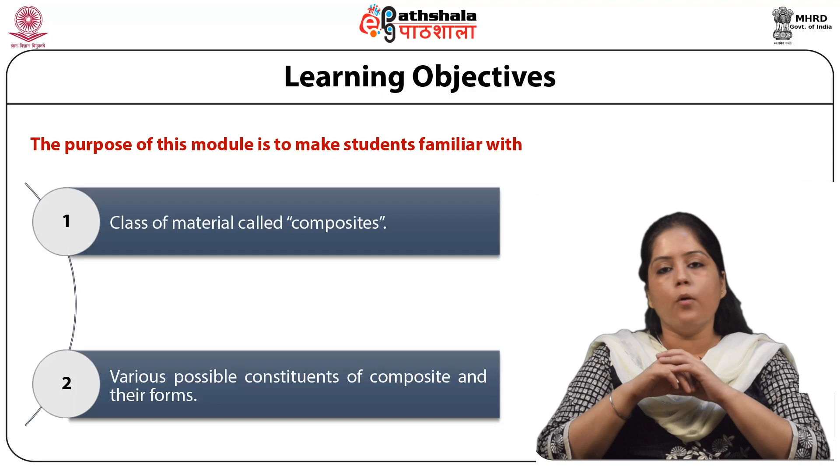First, the class of materials called composites. Second, we will discuss the various possible constituents of composites and their forms. Third, the elastic properties of composites are discussed. Fourth, the mechanical properties of composites are discussed. Lastly, the commercially and technologically relevant composites are discussed.

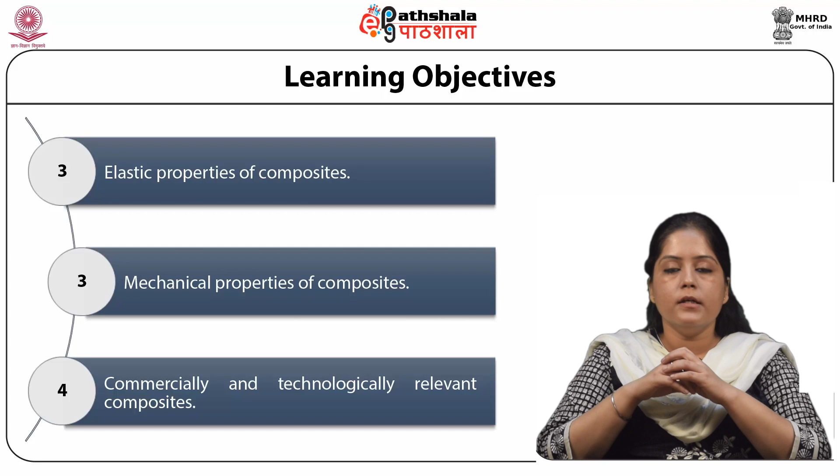Let us start with a basic introduction to the module. There are already several classes of materials available: metals, ceramics, polymers, etc.

Then why is there a need for still another class of materials like composites? There are two main reasons for this, which are interconnected. First, modern technologies demand materials with multifunctional characteristics. Second, there is demand for materials with properties significantly better than existing ones. Currently, materials have their own limitations, and hence there is a need for combining the good properties of one class of materials with that of another.

For example, consider metals, ceramics and plastics. Metals have decent strength and ductility and good toughness, however their density is on the higher side. Ceramics are relatively less dense and very good temperature resistant, however they are beset by poor toughness. Plastics have low density and very good ductility, however they lack thermal stability, chemical resistance, and have very poor mechanical properties.

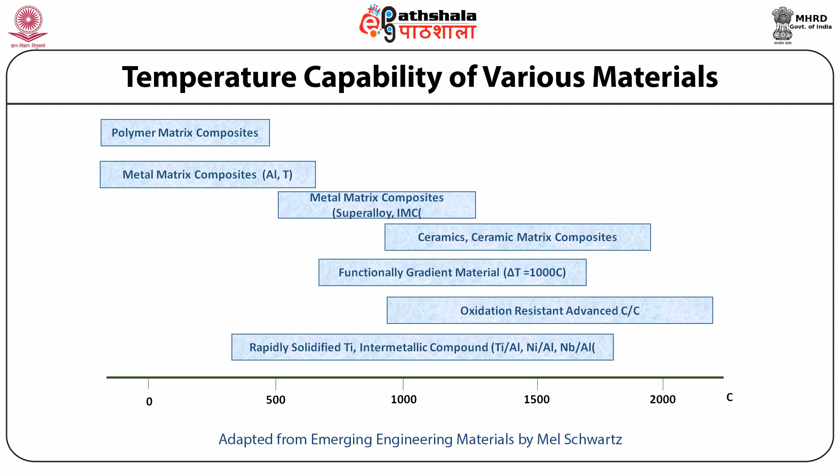So now we will discuss what are composites. In simple words, a composite can be described as a non-homogeneous mixture of other types of engineering materials, that is, matrix and second phase. This figure gives a better understanding of what is really meant by a composite. As shown, composites are nothing but a mixture of any two materials. Usually one of these would form the base or matrix, and the second material is present in the form of dispersoid or fibers. Based on this definition, we can broadly classify composites into three, or basically four, types of classes which we will be discussing.

First is metal matrix composites, where the primary phase is a metal and the reinforcing phase can be metal, ceramic or polymer. Second is ceramic matrix composites, where ceramic is the matrix phase and also the reinforcing phase in most of these; ceramic matrix composites with metal or polymer reinforcement are not common. Third is polymer matrix composites, where the polymer forms the matrix phase and is reinforced by various kinds of metals, ceramics, and even polymers.

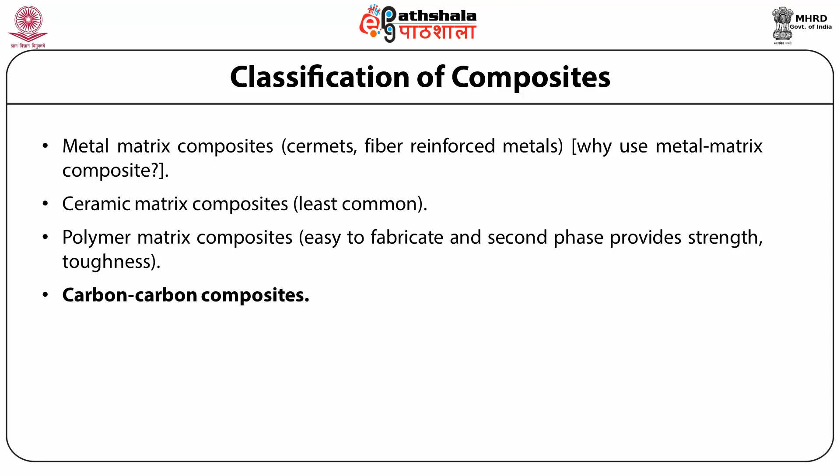Fourth kind of composites are carbon-carbon composites, where carbon fibers are used in a graphite matrix. They are used in the nose of wings and brake plates of airplanes. They have very high temperature resistance and wear resistance, but also have low impact toughness.

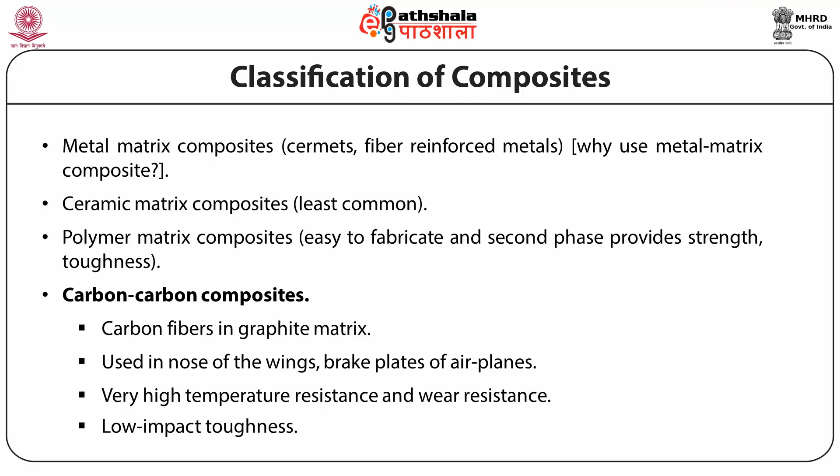Intermetallic composites: intermetallics are a class of materials formed when two or more metals form a compound. These intermetallics are usually found in alloys at different compositions, and hence together can be viewed as a composite, which is very useful for high temperature structural applications. They are lighter, stronger, and more temperature resistant alloys, so they can be used in aerospace, automotive, and chemical industries. They are suitable for temperatures above 1200 degrees Celsius.

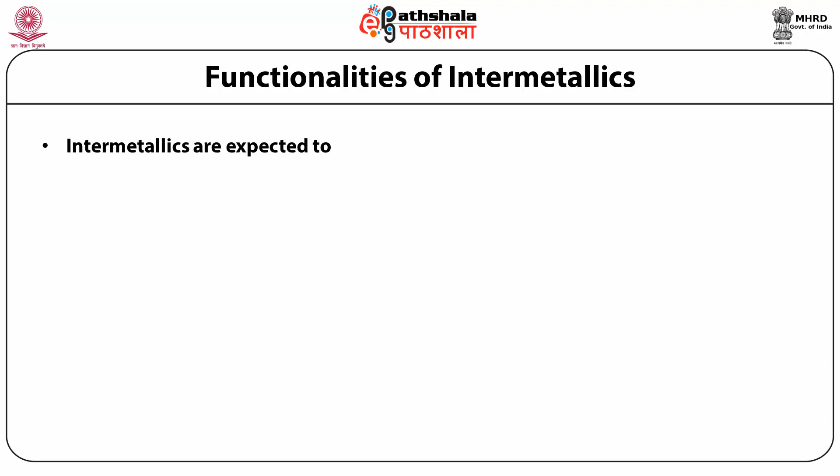Till now we have discussed what intermetallic composites are. Now let us discuss their functionalities or properties. Intermetallics have a very high melting point and retain good mechanical properties at these elevated temperatures. They possess good functional properties like resistance to environmental degradation and chemical stability.

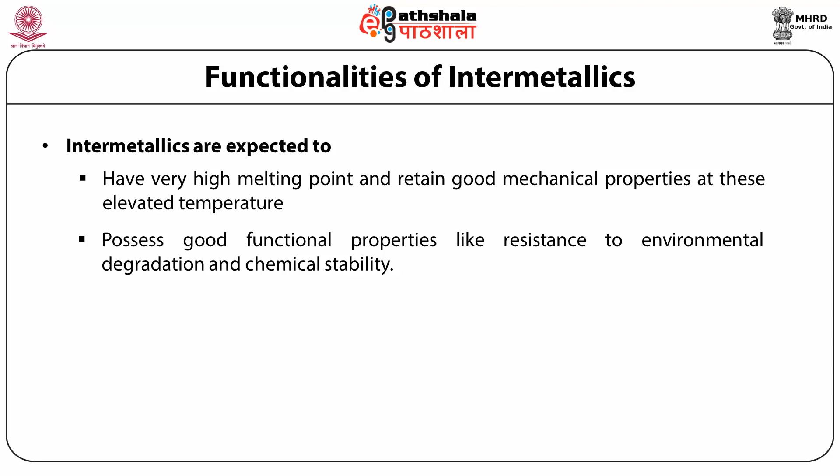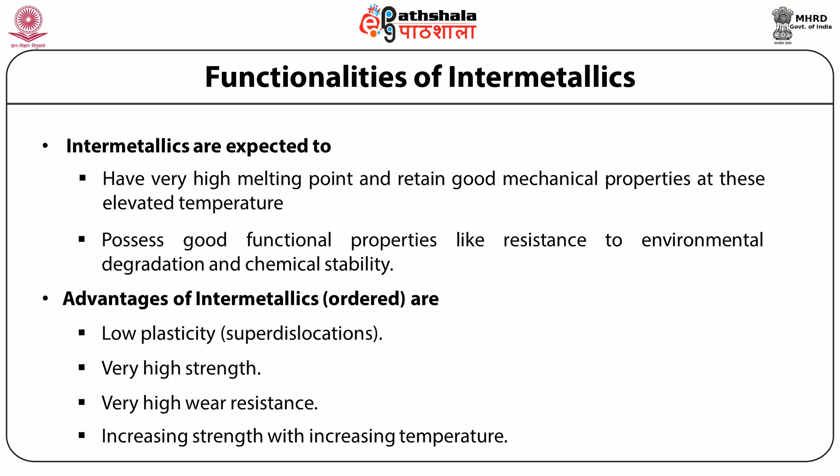Intermetallics have a lot of advantages: low plasticity, very high strength, very high wear resistance, and increasing strength with increasing temperature. However, they possess low toughness and low ductility, much like ceramics. When present as part of a composite alloy, these deleterious effects are counterbalanced by the matrix phase.

Intermetallics can form two kinds of composites. First, metal matrix intermetallic composites, where the matrix is made up of a softer metal or alloy and the hard phase consists of intermetallics. The best example is the nickel superalloy; demand for material systems which can withstand long-term exposure to elevated temperatures has led to the development of intermetallic matrix composites, IMCs. In the conventional sense, composites consist of two phases, a primary phase and a secondary phase.

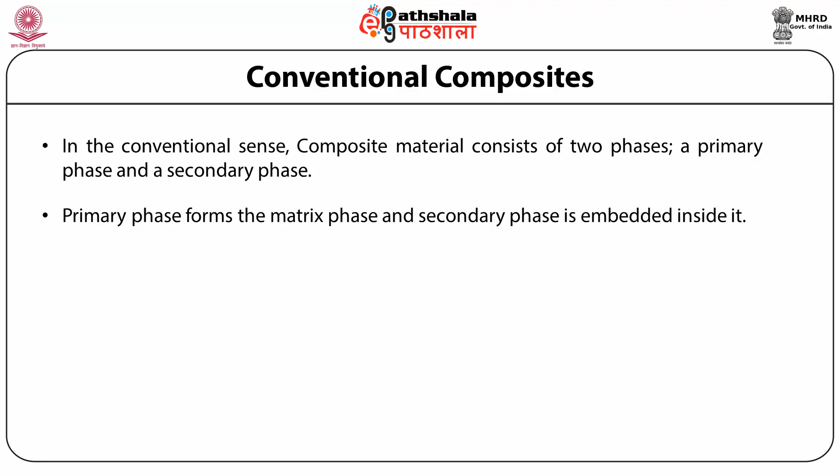Primary phase forms the matrix phase or base, and secondary phase is embedded inside it. As discussed earlier, composites can be classified into three categories: metal matrix, ceramic matrix, and polymer matrix composites.

Now, if the secondary phase is a metal that is reinforced when the primary phase is a metal, then we get powder metal parts infiltrated with a second metal. And if the primary phase is a polymer, examples are plastic molding compounds and steel belted radial tires.

If the secondary phase is a ceramic consisting of a metal primary phase, we can form cermets, fiber reinforced metals. If the primary phase is a ceramic, we can form silicon carbide whisker reinforced Al2O3. And if the primary phase or matrix is a polymer, we can have plastic molding compounds or fiberglass reinforced plastic.

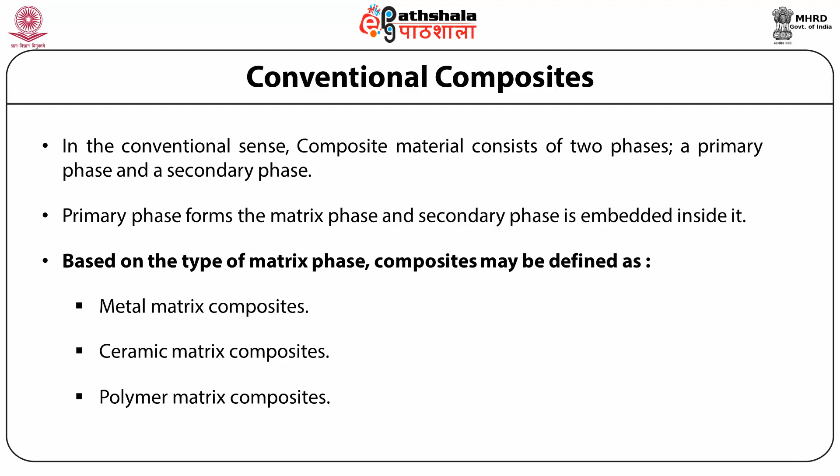So there are various roles played by various phases. The two different phases, primary and secondary, have very specific roles to play - the role of matrix and reinforcing phase.

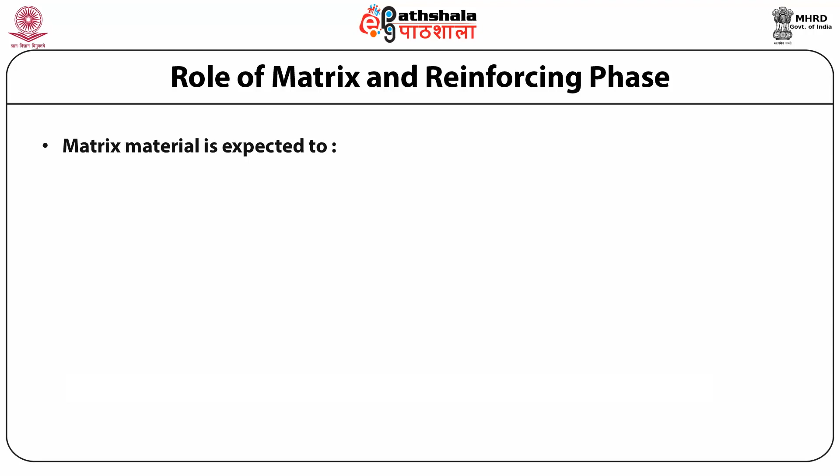First, let us discuss the role of the matrix phase. Matrix material is expected to first provide the bulk form of the component, second, hold and protect the reinforcing phase, third, share the load with the reinforcing phase, and lastly deform partly so that the load can be effectively transferred to the reinforcing phase.

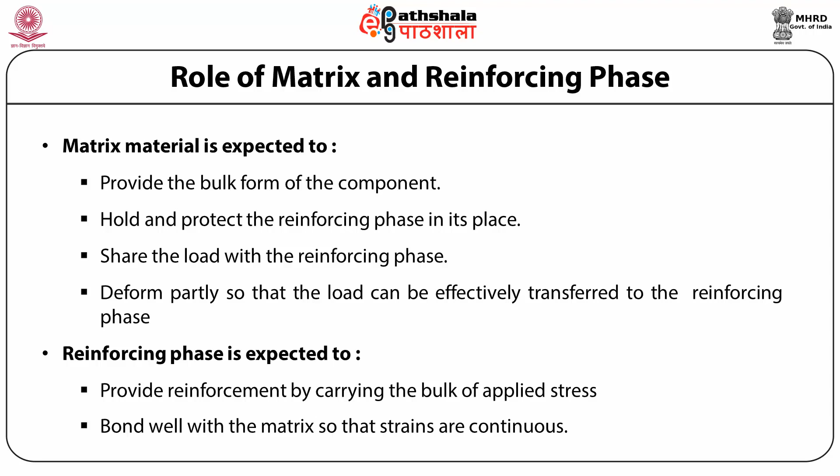Now, the reinforcing phase is expected to first provide reinforcement by carrying the bulk of applied stress, and second, bond well with the matrix so that strains are continuous. Now let us discuss each category of composite in detail.

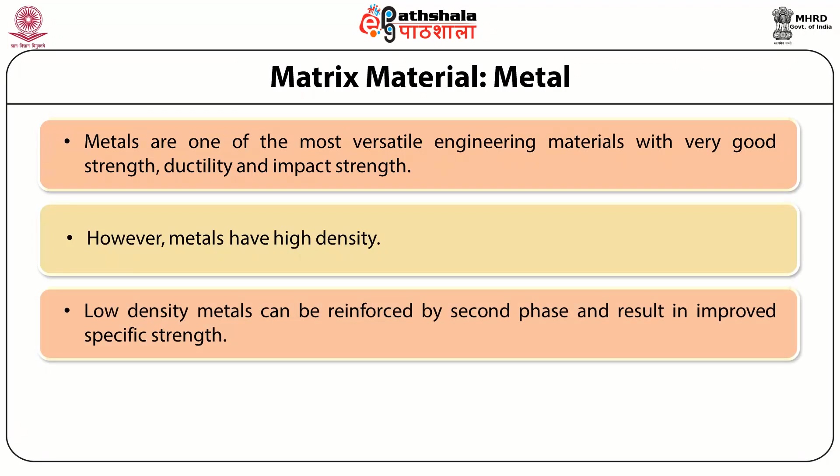Here we will discuss when the matrix material is a metal, that is metal matrix composites. Metals are known for their very high ductility and strength. However, they have relatively high density.

Hence, the primary purpose of metal matrix composites is to enhance specific strength or specific modulus, for example by adding lightweight fibers, or to improve high temperature properties or wear properties, for example by adding ceramics as the second phase. It must be emphasized that among composites, metal matrix composites are the most commonly used material systems. Ceramics and fly ash composites are very well known and widely used metal matrix composites.

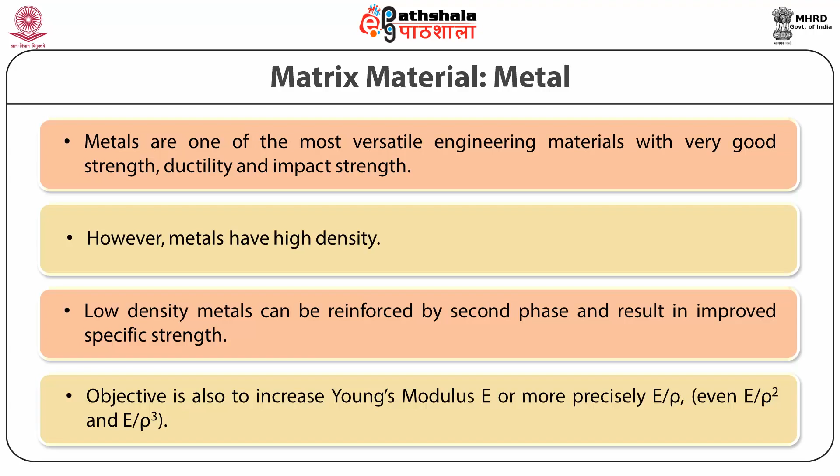Ceramic matrix composites, or when the matrix is a ceramic - the primary purpose of the matrix phase is to provide form and support to the secondary phase. Ceramics and glasses are not known for their toughness and ductility, hence ceramic based composites are very rare.

Since these materials are very good insulators and have very high chemical and thermal stability, ceramic matrix composites find use mainly in high temperature applications, for example thermal barrier coatings on aerospace or rocket panels.

It has been discussed earlier that ceramic matrix composites are usually reinforced by different ceramics. The purpose of such reinforcement is to improve toughness and reduce brittleness.

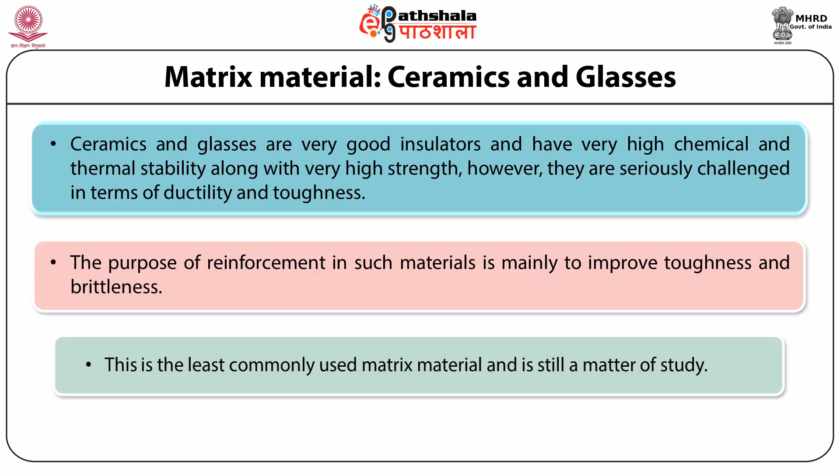Polymer matrix composites. Polymers have ultra high ductility and mainly lack strength and high temperature properties. As far as strength is concerned, polymer matrix composites can be reinforced by strong fibers to give the requisite strength. Fiber reinforced polymers, FRPs, are a very good example of this, finding applications in automobile and plane panels.

Polymer matrix composites, however, are limited in their applicability for high temperature applications. Since polymers have very low density, the addition of a secondary phase for the purpose of light weighting is not a consideration here.

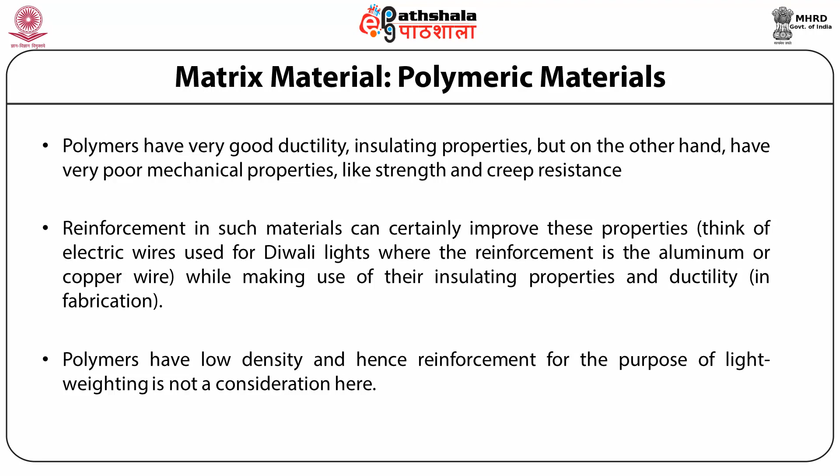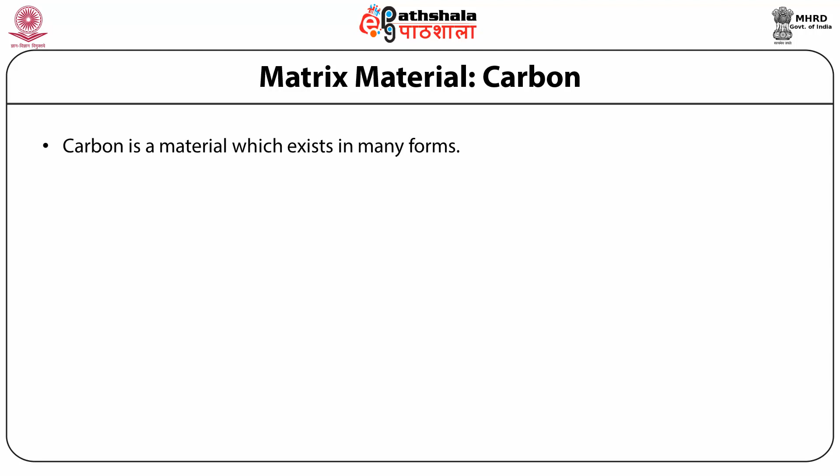Carbon-carbon composites. Apart from the above three classes of composites, there is still another class which does not fall in any of the above categories, and this is carbon-carbon composites. Carbon is a very unique material that exists in different forms, from a very soft graphite phase to a very hard diamond phase to very strong carbon nanotubes.

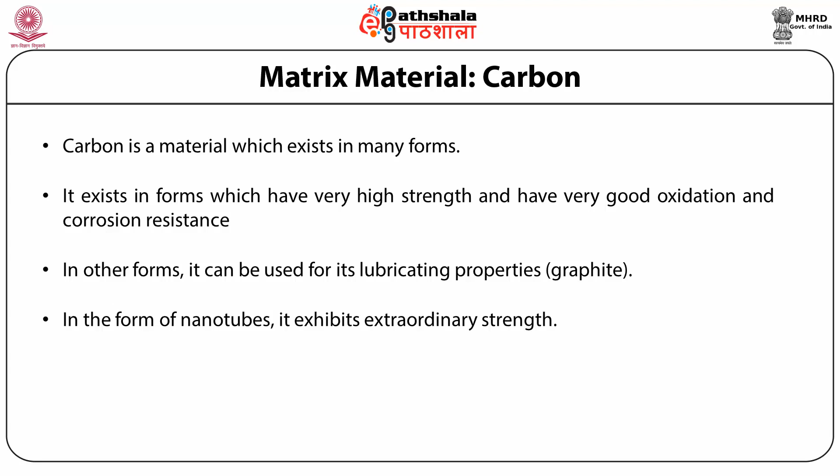Hence, different forms of carbon can form the matrix as well as the secondary reinforcing phase, giving rise to unique properties. Such composites have very good strength as well as high temperature and mechanical properties, and hence have found applications in nose and brake plates of airplanes.

So, let us discuss now the reinforcing phase. The reinforcing phase can be any of the above types of materials, including carbon and boron. The reinforcing phase can exist in various forms.

First, fibers - long strands with circular cross sections, with diameters ranging from a few microns to fractions of a millimeter. Second are particles, particulate shaped, again ranging from a few microns to a fraction of a millimeter. Third are flakes, two-dimensional particles like platelets.

Fourth, infiltrated phase, when the secondary phase acts like a filler in the matrix. These are usually found in PM. Next, we will discuss the reinforcing phase, that is, fibers.

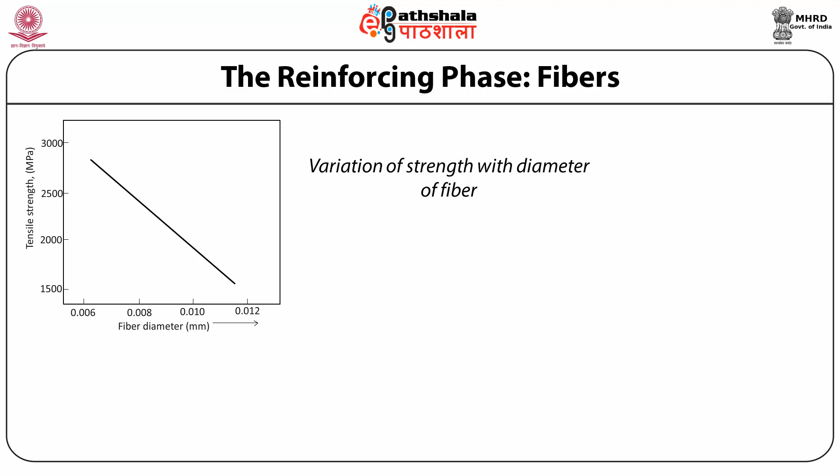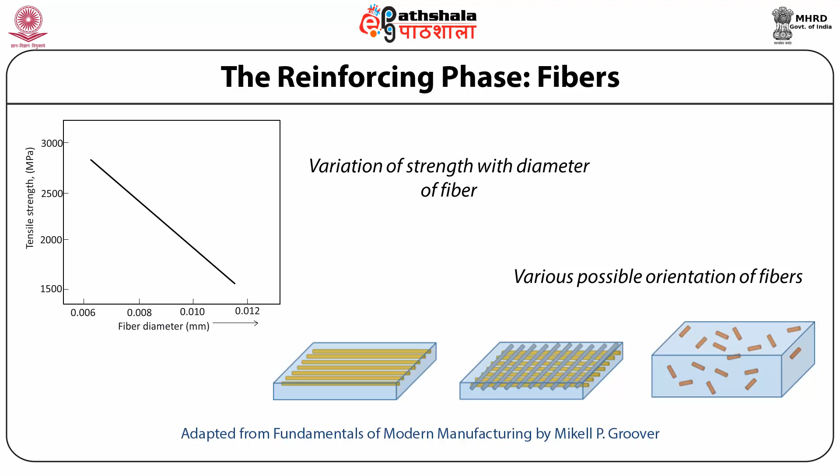Another important aspect is the bonding between the fiber and the matrix. Hence, the fiber orientation and the bonding between the fiber and the matrix are the important parameters in determining the overall strength of the composite. So, if the two are not bonded properly, then the fibers cannot take the load as expected.

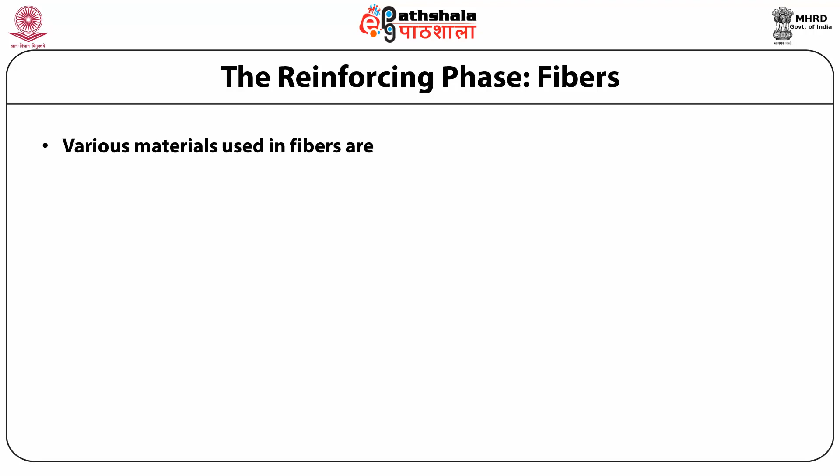Now, still we are continuing the discussion over the reinforcing phase, that is fibers. Various materials are used as fibers. One of the most important characteristics expected from these materials is that they should have a very high strength. So, there are some common materials and their properties which are used as fibers, as follows. First is glass.

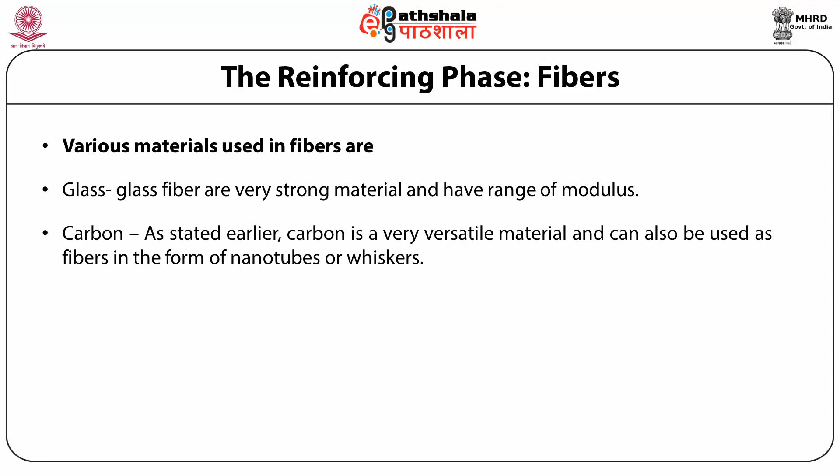Glass fibers are very strong materials and they have a range of modulus. Second is carbon. As stated earlier, carbon is a versatile material and it can also be used as fibers in the form of nanotubes or whiskers. Third is boron. It has very high elastic modulus and is used in aerospace applications.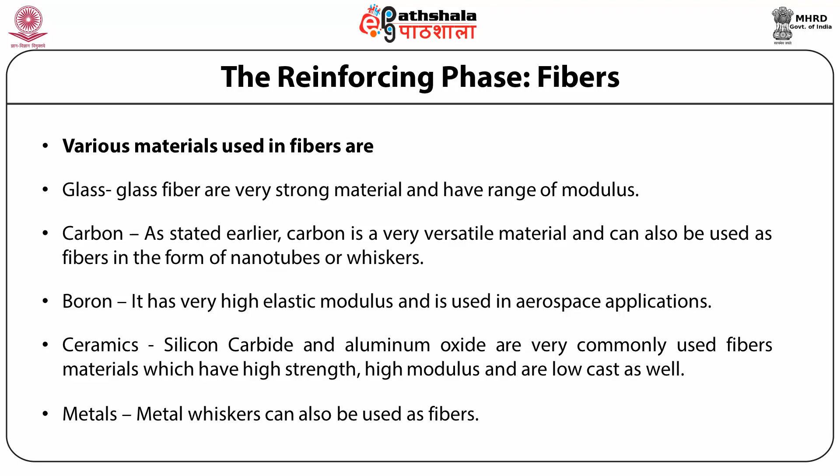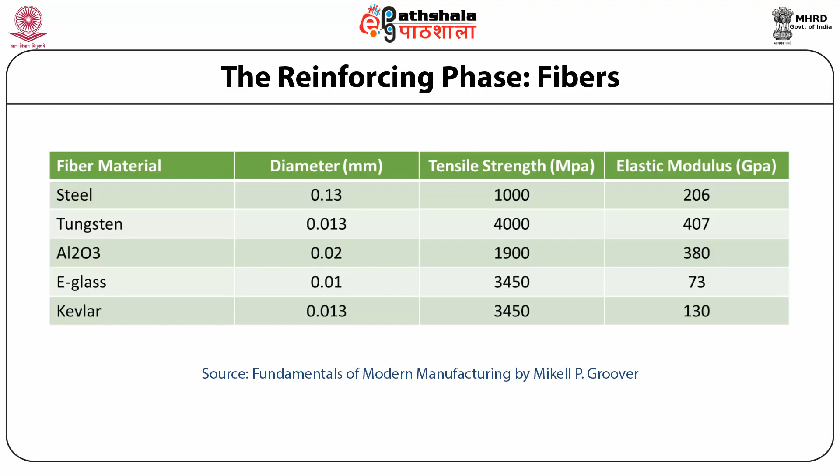Fourth material are the ceramics. Silicon carbide and aluminium oxide are very commonly used fiber materials which have high strength, high modulus, and are low cost as well. Fifth, obviously, are the metals. Metal whiskers can also be used as fibers. This table shows the typical properties of fiber materials used as reinforcement in composites. So here the diameter, tensile strength, and the elastic modulus have been tabulated for different fiber materials.

The reinforcing phase, that is particles. Particulates of metals and ceramics can also be used as reinforcing phases. Even though they are very small in size, they are found to share the load and even improve other properties like wear and high temperature stability.

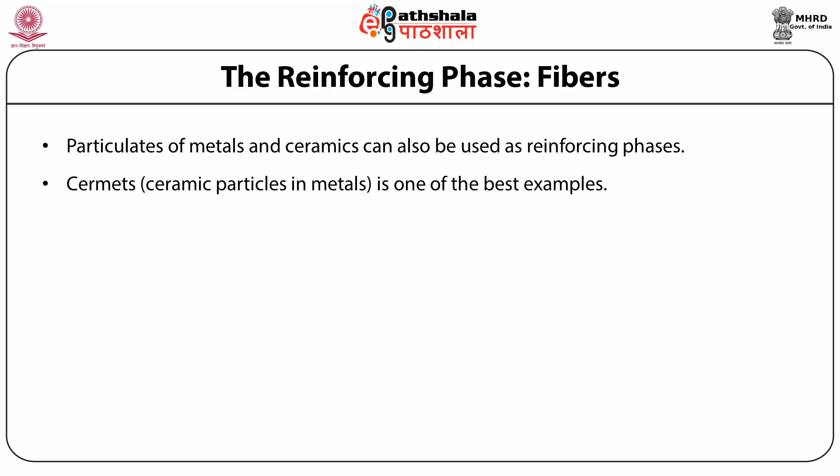Cermets, ceramic particles in metals, is one of the best examples of particle-based reinforcing phase. Cermets are heavily used in tools and dies because of their excellent wear resistance and high temperature strength. So, the distribution of particles is random and homogeneous, leading to isotropic properties of the composite.

In case of fiber-based reinforcement, the distribution is always preferred in a certain direction, leading to anisotropic properties of the composite. Strengthening in particle-based reinforcement is not much dependent on the geometry, as all the particles can be considered to have an aspect ratio of 1. However, it does depend on particle size.

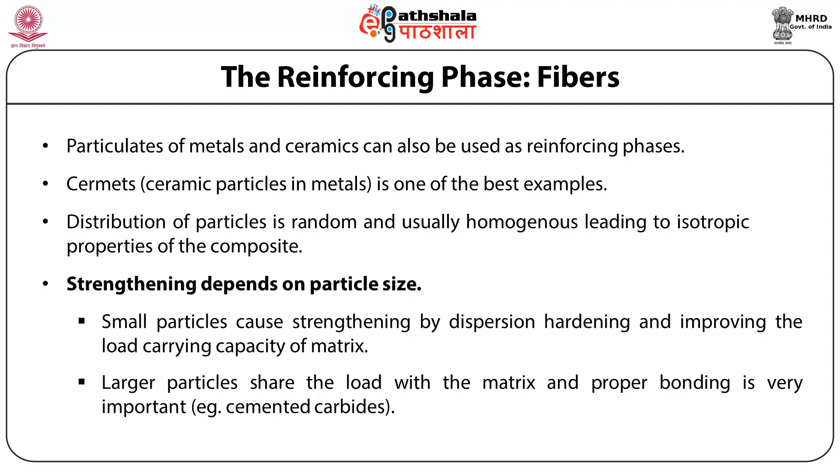Based on the particle size, strengthening mechanism can be put in two classes. First, small particles cause strengthening by dispersion hardening and improving the load carrying capacity of the matrix. Second, larger particles share the load with the matrix, and proper bonding is very important.

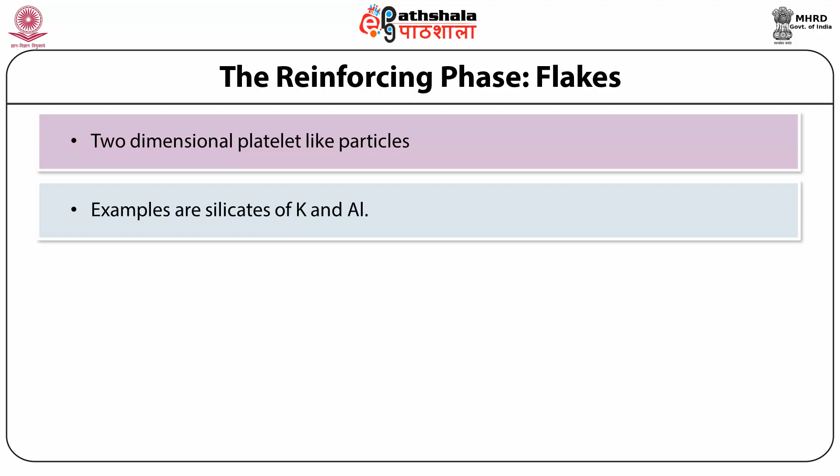Now let us discuss another reinforcing phase, that is flake. Flakes are basically two-dimensional platelet-like particles. Examples include the silicates of potassium and aluminium. These flakes are usually applied as reinforcing agents in polymers. They add strength and stiffness to polymers. Platelet sizes range from 0.01 to 1 mm, and thickness is usually of the order of 1 to 5 microns.

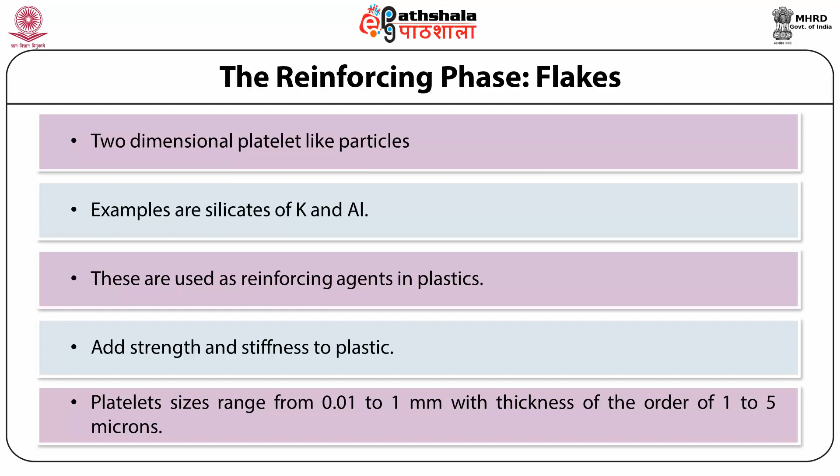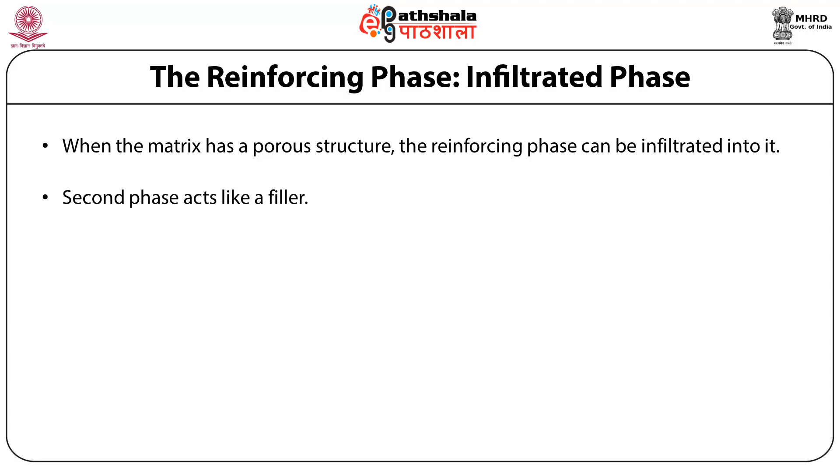Now let us discuss another reinforcing phase, that is infiltrated phase. When the matrix phase has a porous structure, the reinforcing phase can be infiltrated into this porous structure. In these cases, the second phase acts like a filler that covers the open pores. The reinforcing phase fills up these pores and thus provides additional strength and integrity to the structure.

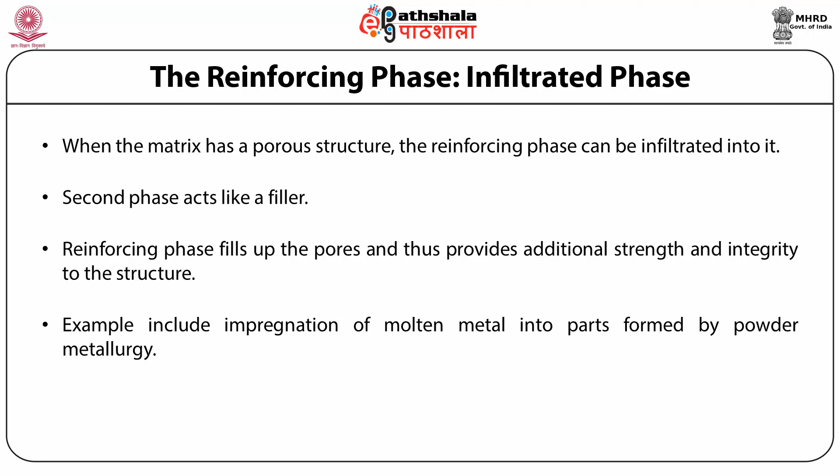Some metal matrix composites are manufactured in this manner, where the metal foam is created first and then the second phase is infiltrated into this foam. Conversely, molten metals can be impregnated into parts formed by powder metallurgy, thereby reinforcing the overall part. Oil impregnated bearings and gears can also be considered as examples of this type of reinforcing phase.

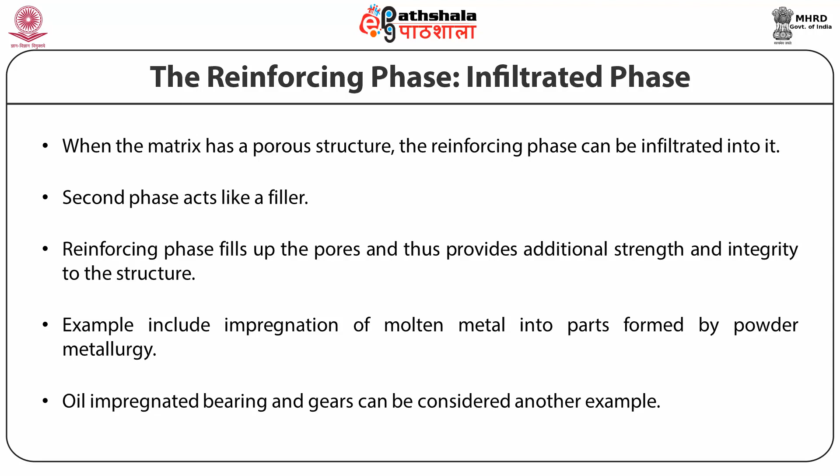So students, let us summarize what we have learned in this module. First, the temperature capability of various materials is discussed. Second, different types of composites are discussed. Third, intermetallic composites, that is, their properties and advantages are discussed. The comparison of various conventional composites and their categories are discussed.

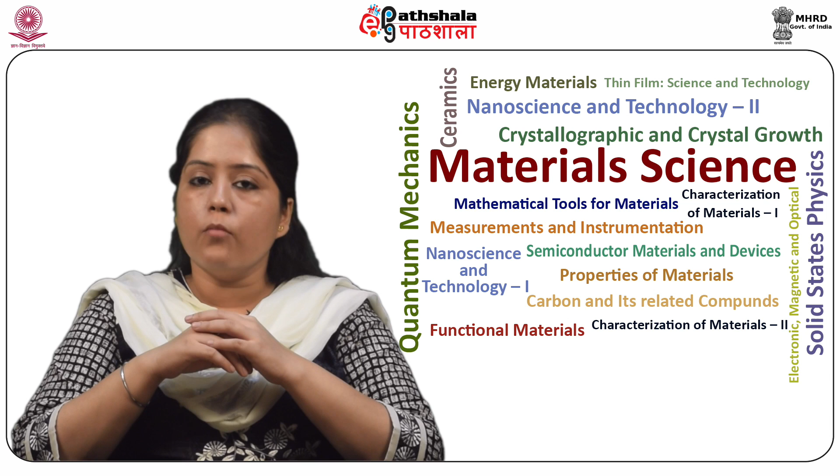Next is the role of matrix and reinforcing phase, and based on the choice of phase, classification is discussed. Next, the metal matrix, ceramic matrix, polymer matrix, and carbon-carbon composites, these types of composites are discussed. Reinforcing phases like fibers, particles, flakes, infiltrated fillers or phases, they are discussed in this module. Thank you.